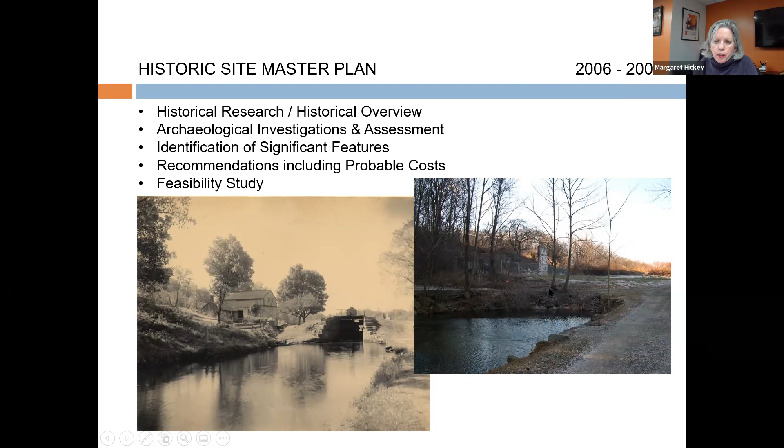It's so picturesque, it's really beautiful, but the only thing we saw was a little bit of the lock tender's house, which was essentially a ruin, and then also some of the stones from the lock visible in the grass. I'm pretty sure I have a picture of that here, you can see this here is that there.

Again, a historic picture of the lock tender's house, and a picture from 2006 when we came upon the lock. That collapse had literally happened like a couple of weeks before we even started our project. There was vandalism, so more of the wall had been standing, but you could see this is a fresh pushover by whoever did this.

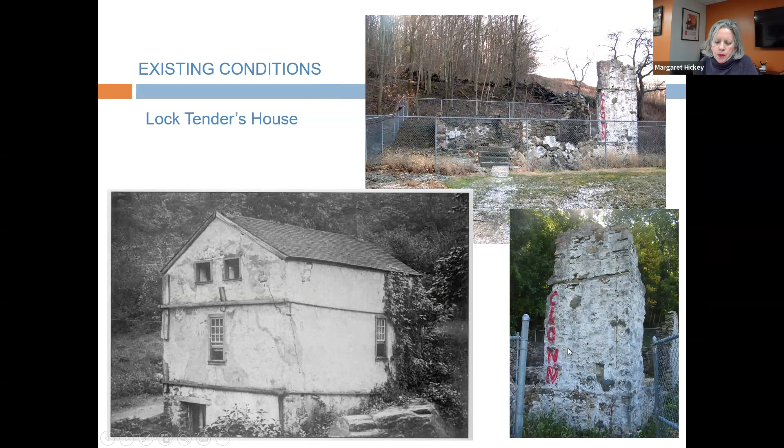Again, more pictures of the lock tender's house when we came across it. Here is one of the iron bars, which was from the inclined planes, used to tie the house together.

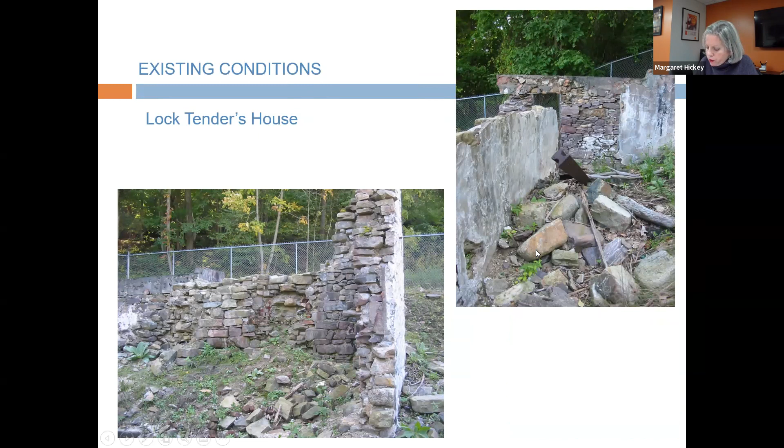When we actually started to dive into the drawings, we took another look at the property and really started to dive down into the detail. Here we have the masonry ledge for where we know the first floor level started. We have the threshold for the door and the door location, and we were able to locate all the doors and windows and things like that.

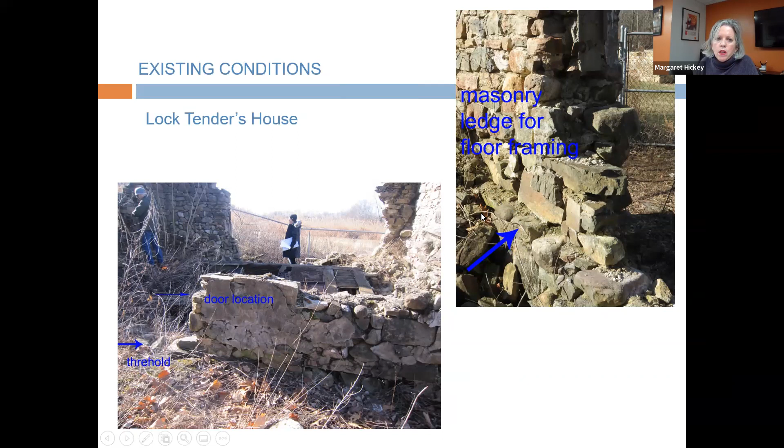The area where the fireplace was — this is actually a picture from a drawing in Bob Goller's report, which we were able to use because the basement was actually filled with all the stones. So we weren't entirely sure how wide the fireplace supports were and things like that. The other component of the project — but let me just go back.

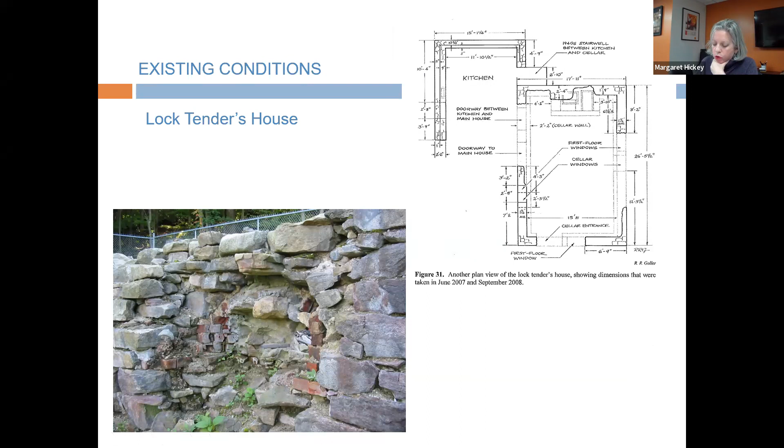Even with this amount of information, we really had a sense that we could restore the lock tender's house. And that was actually one of the recommendations in the historic site master plan.

Then the other component was the lock itself. Since that was completely buried, Hunter Research took the lead in investigating and doing actual digs, several investigative pits to determine what was remaining of the lock.

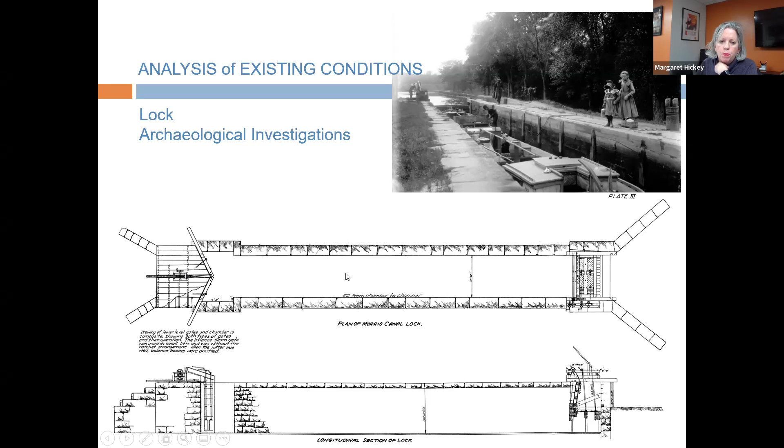We had some suspicions that a good portion of the lock, or all of it, was actually tipped over when it was dismantled. So a couple of the top feet were tipped over and popped into the lock itself. There was also a suspicion that some of the gates and mechanisms may still be there, and the archaeology really helped to prove that to be the case.

They found a lot of the remnants where they dug. We didn't dig everywhere, but where they dug they found evidence of many of the mechanisms. We found the capstones, and they suspected that the wood cribbing under the lock walls would be intact. So the plan then was to restore the lock as well.

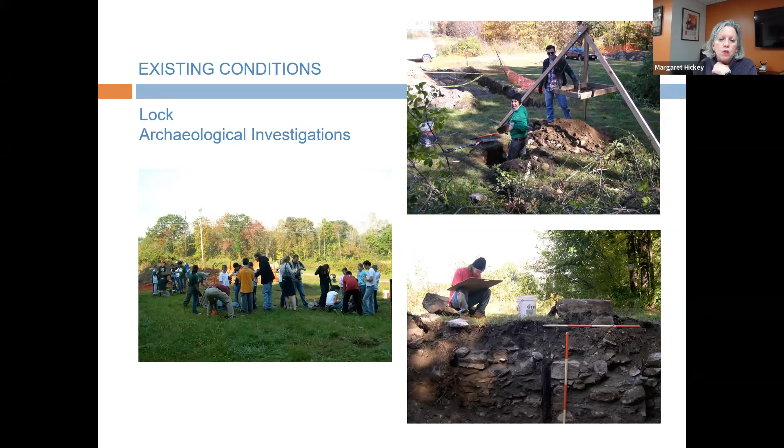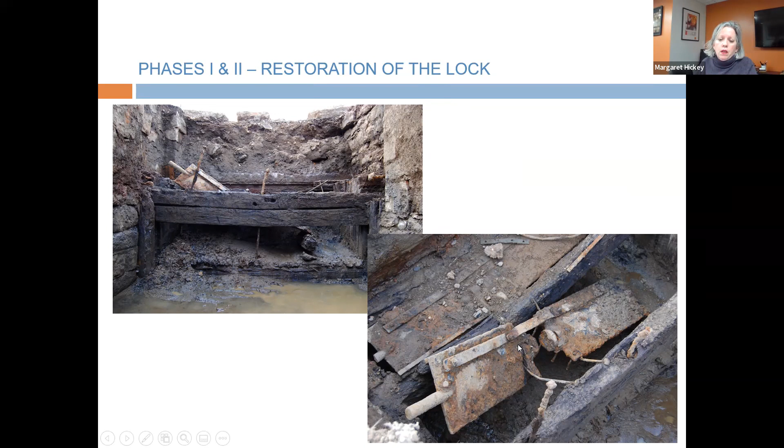This is some of the work with the cribbing and the wicket gates that were found in the excavations that Hunter did while the contractor was on site.

A picture of the lock excavated, showing the condition of the walls. You can see where there used to be wood embedded in the lock walls to hold a wood bumper wall on one side of the lock. There was so much evidence, so much to use to be able to restore the lock.

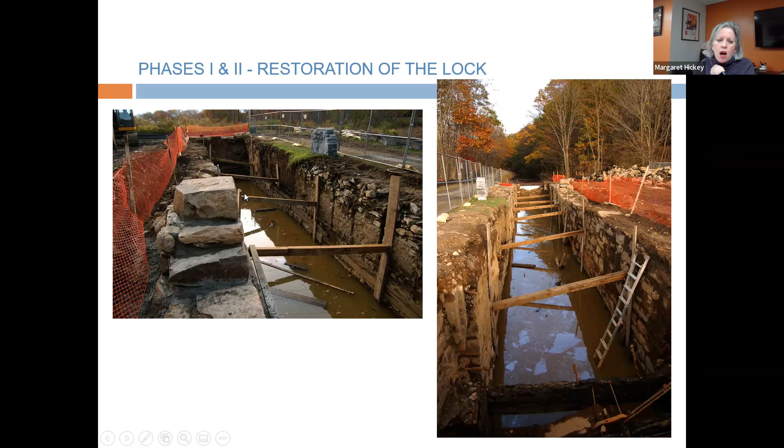The timber cribbing under the lock walls was apparently in good shape. You can see there's water in the lock, which actually helps preserve that material.

Here are more pictures of the work going on and stabilization measures. They hung these things above so they could cover things at night to protect the pointing, showing a lot of evidence of the evolution of the lock.

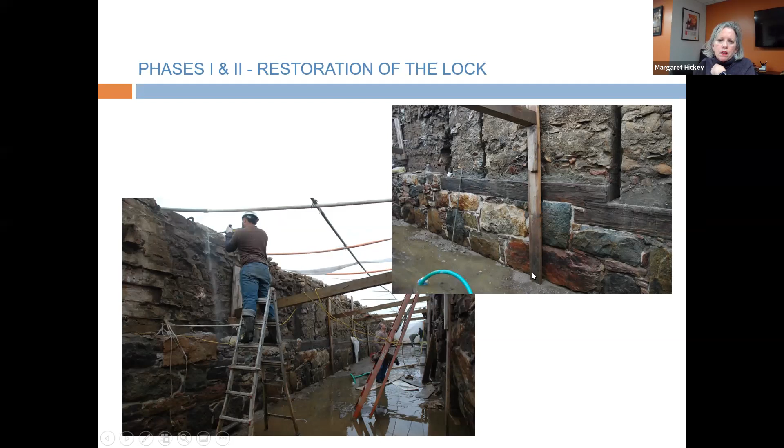Another picture of more stonework done. This is the east end of the lock where the canal comes in; the west end was pretty much untouched. So the scope of the work really focused on the majority of the lock walls, the east end, and the gates. The first phase focused just on the masonry.

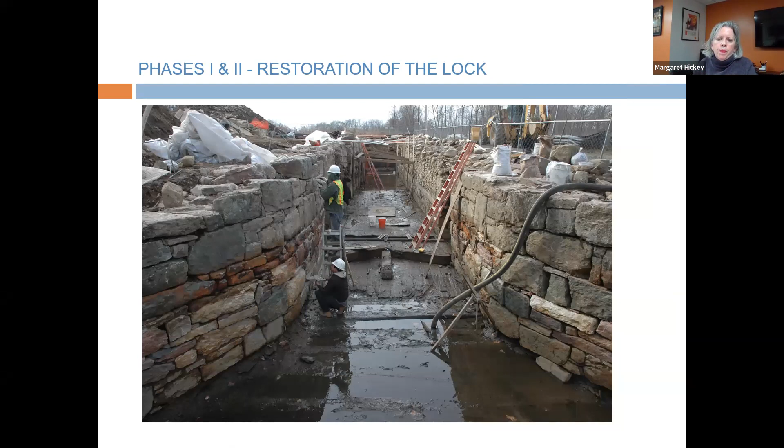The second phase took more of the lock out of the ground, restored the capstones, restored the wood bumper, and then rebuilt the miter gate at the east end of the lock.

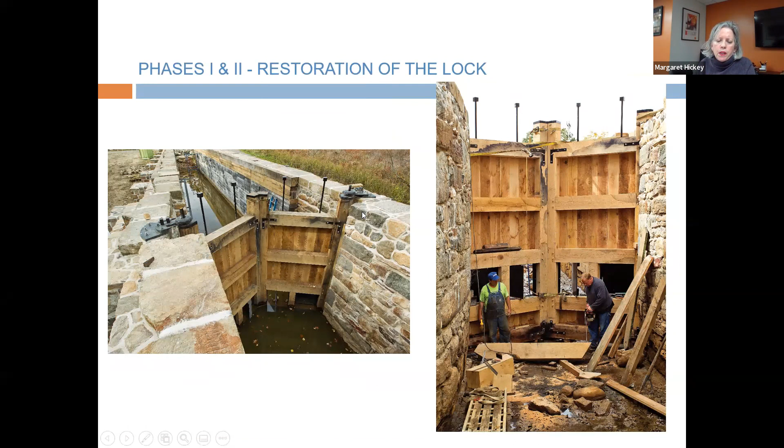So here it is under construction. See the massive size compared to the two men in the pit, and then this is it at completion, and this is it looking from the canal. That was phase 1 and 2 of the restoration of the lock.

John went back, pounded more pavement, and was able to get funding for our firm and Doug Bond's firm to prepare the contract documents to complete the restoration of the lock and also to restore the lock tender's house. With those documents, he was able to secure TAP funding from the Federal Highway through DOT to complete the entire restoration.

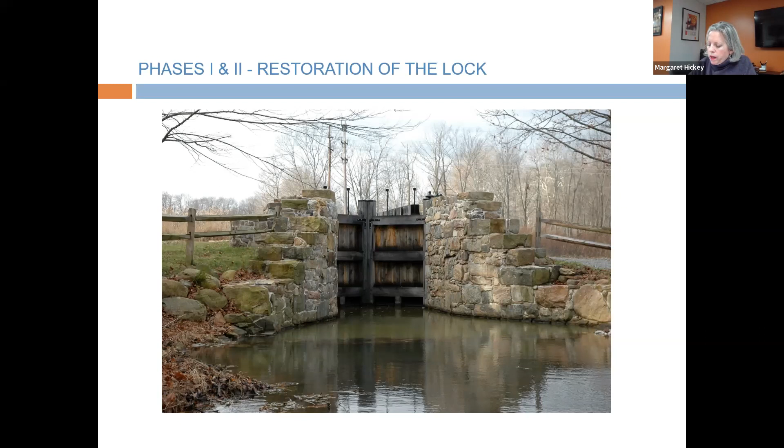I'm going to summarize some of the things we faced during this whole process. It was a long process, this second part. We originally wanted to finish the lock and stabilize the lock tender's house so archaeology could happen there, then do a separate phase to restore the lock tender's house on its own.

But DOT didn't like that, so we ended up combining the two projects, and that's how we're proceeding now. The contractor, as you'll see from the photographs, is working on both component projects at the same time.

This is the entire site, and I'll go over that. Let me just explain a few things first.

We had to bid the project twice because we didn't have enough money after the first time. We got the same two contractors and revised the drawings to clarify some things that came out during bidding. The borough offered their services on excavations related to installing the electrical service, and we were able to bring the project down a little. The current cost is about $3.3 million for the restoration of the lock tender's house, and also to provide barrier-free restrooms at Hugh Force Park.

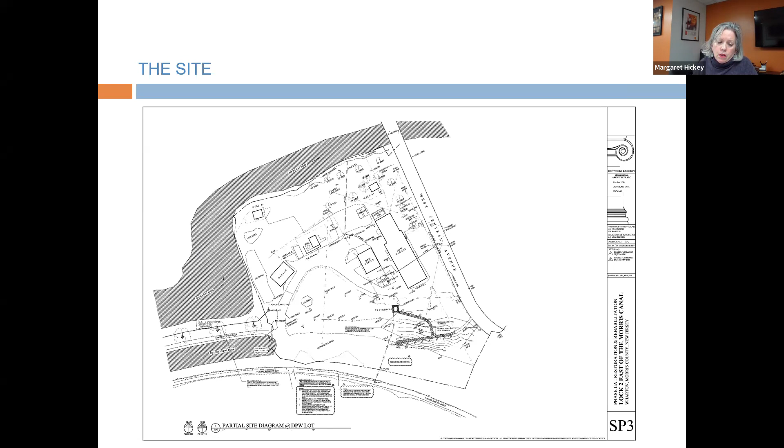The other problem was there are no utilities at the lock tender's house: no water, no sewer, no gas, no electric. So we decided all systems at the lock tender's house would be electric, and we're bringing new service from the street to the restroom building, across the parking lot, and along the railroad bed up above the canal. On the site plan, this is Hugh Force Park, this is the lock. The electric goes from here all the way down and across into the lock tender's house. That was a big part of the project, but a really important one, otherwise the lock tender's house would be usable for only a couple months a year rather than year round.

We're also proposing to put lights along the towpath, so that programming can happen more than just during the day, which is always nice. We really like when historic sites get more use than a couple of days a month.

We also had to worry about wetlands, endangered species, and open water requirements, so there was a lot of site work and project approvals from the NJDEP. We also had to make sure that our path around the lock and to the lock tender's house is barrier-free accessible, so we had to make some adjustments to how the site was manipulated in order to meet those requirements.

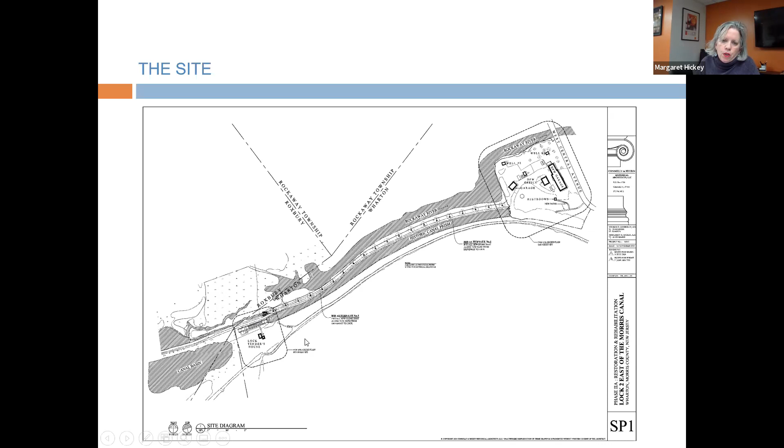Then when we were pretty much done with the design, we had to convince the New Jersey Historic Preservation Office that this was a good idea. And they did - we had them come out for a site visit. They saw all the stone in the lock tender's house, showing that a lot of materials are there for us to use. The lock had already been partially restored, so they saw that and were convinced.

This is the site plan for the lock tender's house. You come up the towpath, and this grade will be manipulated. We're going to go over a concrete removable bridge, which is really there to help the borough with maintenance of the property. Our ultimate goal is to connect the lock to the basin - whether that's going to happen or not is to be seen, but at least we're able to do that with this particular component.

So we're prepared - we bring people over the waste weir, over a little footbridge, and then up into the lock tender's house.

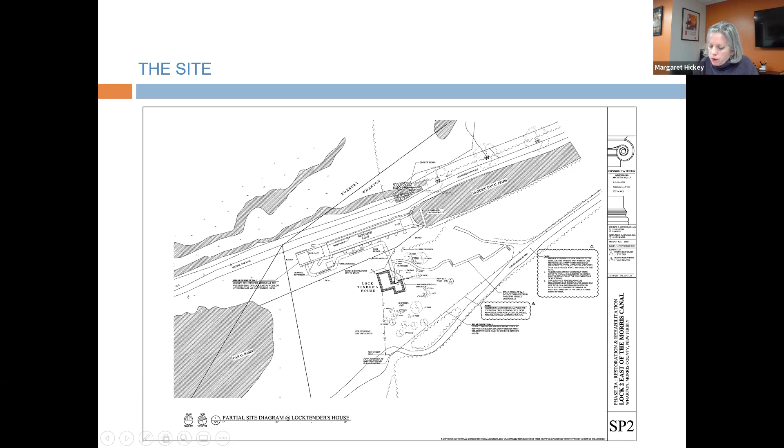The next part, I'm going to go through the sequencing of the project, almost like a month-by-month progression. The work started, and some things I'll talk about, and some I'll just show pretty pictures of how things moved along. We hopefully did this in enough chronological order that you see the progression.

We begin with the wall stabilization. We were very concerned, and the archaeologist was very concerned, about digging along the foundations with this particular piece of wall that turned out to be in worse condition than we thought. So one of the first things we had to do was go back to the Historic Preservation Office and say, this is worse than we thought - can we take it down to stabilize it and then rebuild it? And they did permit that.

So you'll see that this wall is here. The contractor did have to remove material in order to rebuild it, and this wall actually turned out to be unstable even below grade, so there was more work in that regard.

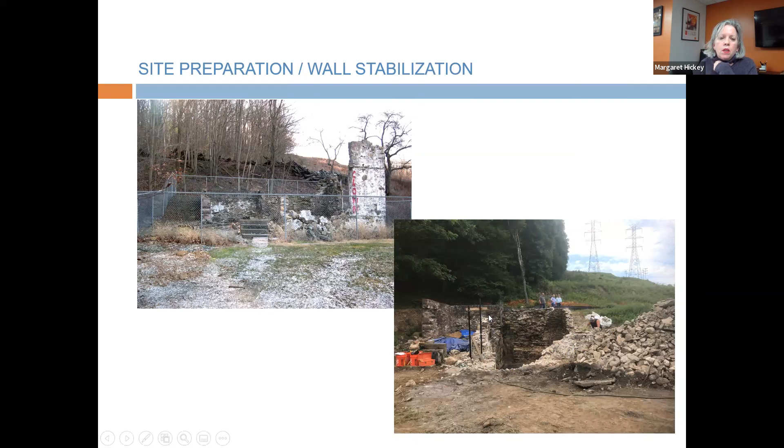While they were stabilizing, they took a lot of stuff out of the lock tender's house, but you remember the stone was pretty much up to here, and now there's like a pile of stone. There was a pile of stone over here in that last picture. All this is material that came out of the lock tender's house. Although this came from the lock, it was just stored here between projects.

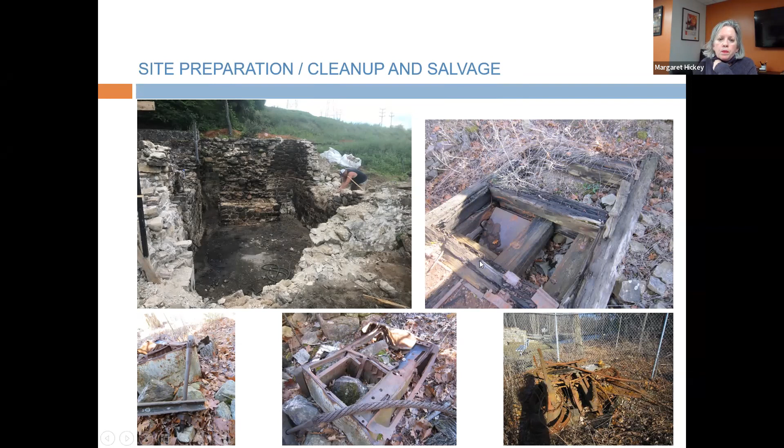Here's some archaeological digging going on. This is our structural engineer here. They dug a pit right next to the foundation so we could confirm the masonry was actually in good shape, and it really was on three sides of the building, which was heartening. The front needed a little bit more work than we anticipated, but we always build allowances into our projects.

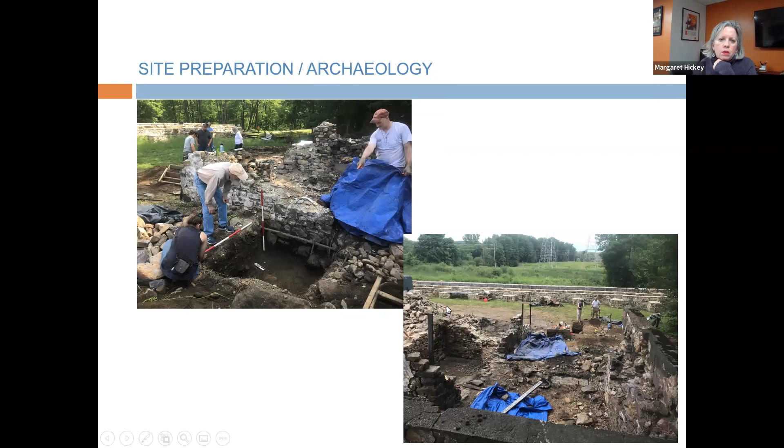There's an archaeologist there, getting ready to move forward with construction. More archaeological digs. We were able to confirm the floor levels between the buildings. We did our best educated guess, but we were pretty darn close. The front wall of what we call the kitchen wing, this area here, showed to be wood in the historic pictures, but historic pictures are from really far away. This dig confirmed that indeed the front wall was of wood construction. It's always nice to confirm your beliefs through archaeology.

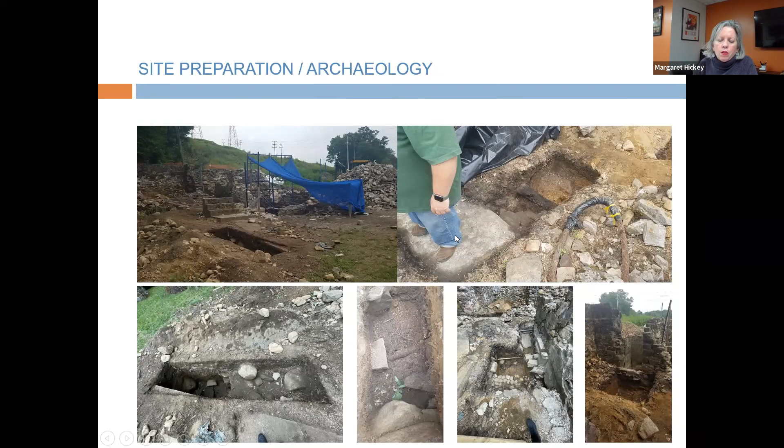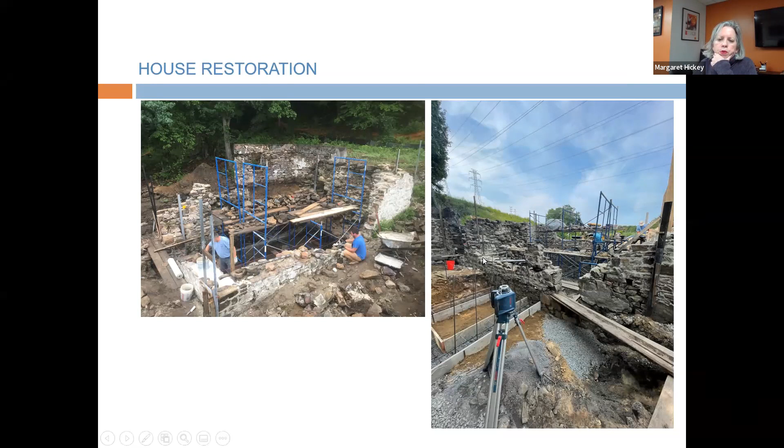Now we start to see the construction going up. The mason has his level out, they have their scaffolding going. It is a slow process - it took several months for them to rebuild the stone masonry. They had to do it in sections because they built to a certain point, then brought the floor in, then built to another point, then brought the floor in again, and you'll see that in some of the photographs. So here we are with the construction progressing.

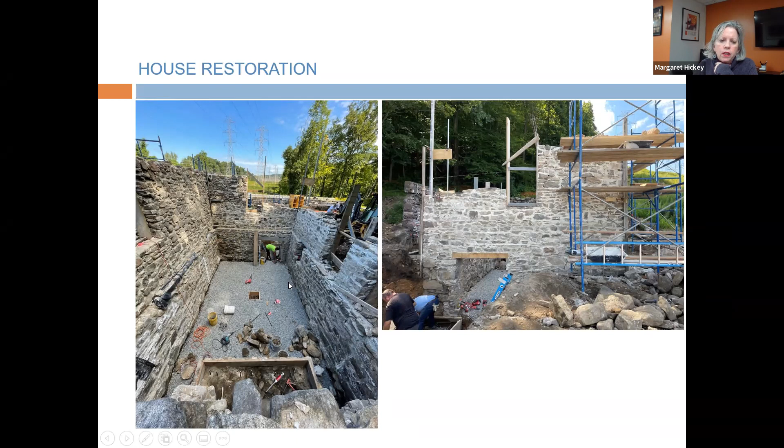When they took the stone out of the basement of the lock, they actually found what we call a rat slab - a cement floor, very thin. It had a mid-20th century date on it. Somebody did date it, which is interesting. We couldn't save it - I think we saved that little piece that had the date - but because it was too thin and we needed to put equipment in, we put in a new slab. But you can see the ledge around the perimeter of the building where the first floor framing sat, so it's always nice to have clues in the architecture on where things are supposed to go.

This is looking at the junction between the entrance into what we call the main house and the kitchen wing. Again, we have to be barrier-free accessible. We note that this is all modern construction, but this will all actually get buried - you won't see any of that, with the juxtaposition of the historic fabric behind.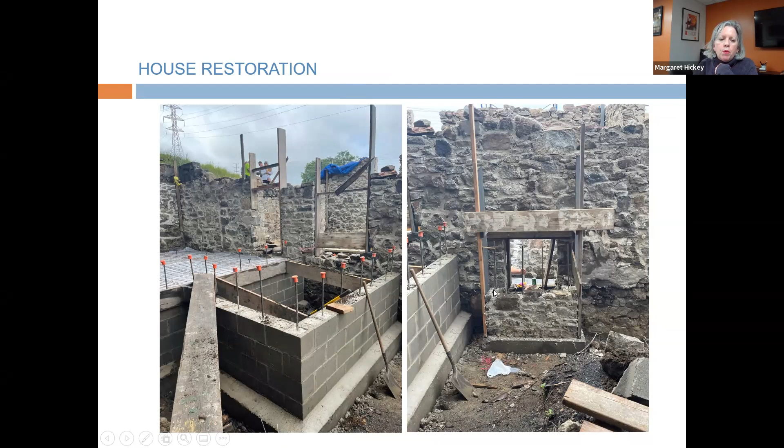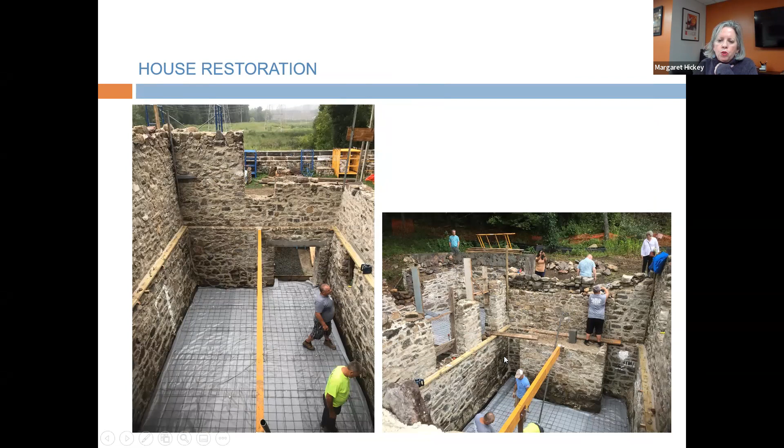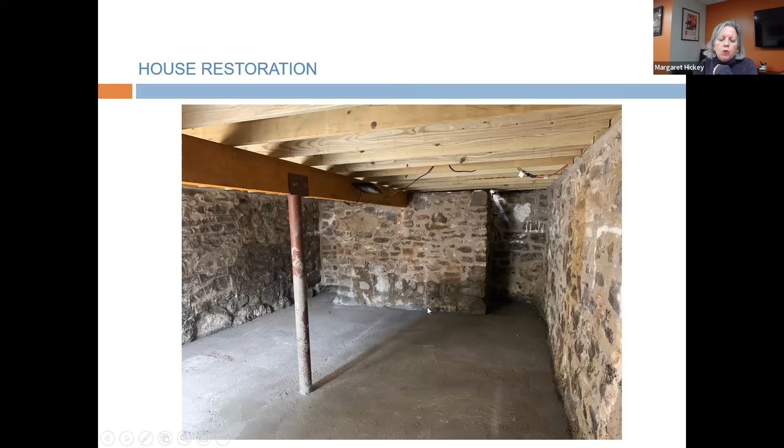More construction going on, the center beams going in, multiple things going on at once, which was nice. Here is the basement with the first floor framing installed, and there didn't need to be a lot of work when we actually took the stone out of the basement. The fireplace support was pretty much intact - they had to repoint it and such, but most of it was there. Here's the entrance to the basement that we saw in the historic photographs.

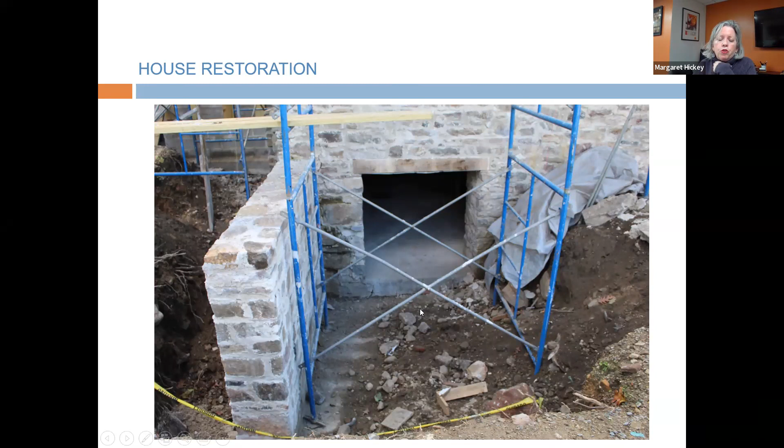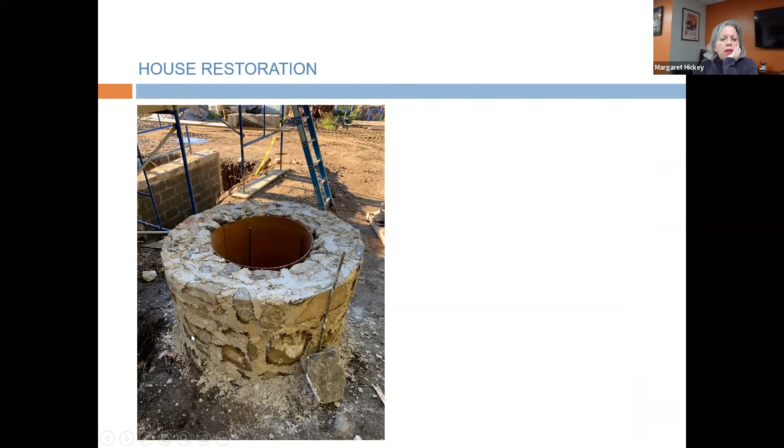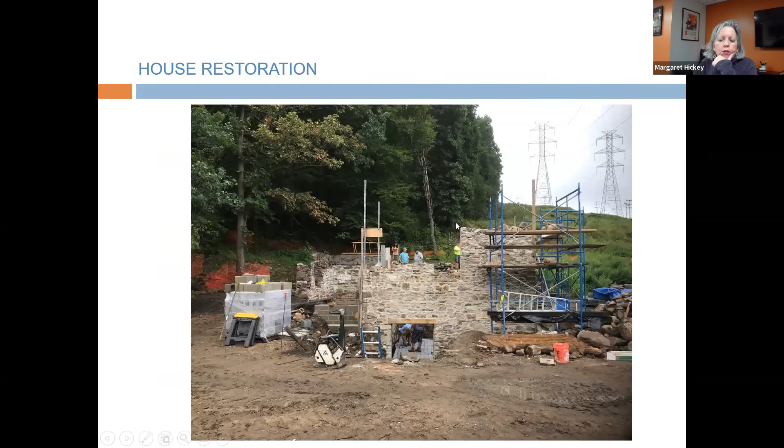In preparation for water and things like that, we will be putting a drain outside the door so we can prevent flooding and moisture infiltration in the basement. The well, which we could barely see on the ground before we started the work, started to take shape once we did the excavations around the entrances. Here we see things starting to go up a little bit more. Picture one, window barely there; picture two, window in, and we're about to hit the second floor level.

More construction. You can see they're starting to put in the framing for the second floor.

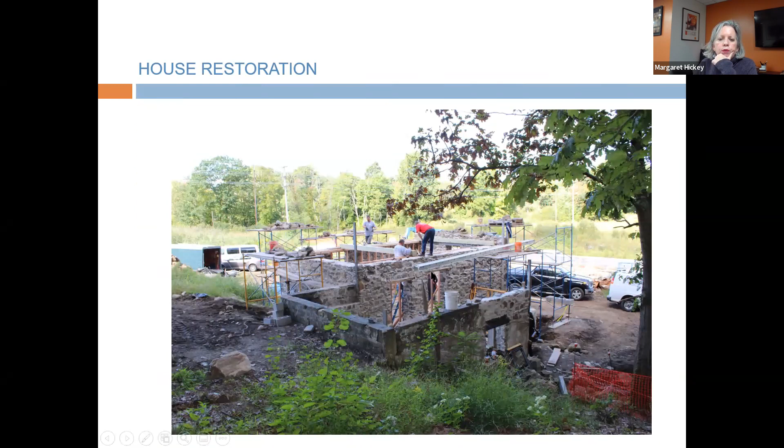This photograph is interesting. When you walk in, you're going, there's wood in this construction. I don't know why that's there, but they've installed that in order to make sure they have a level floor. Then they build the masonry up into the bottom of the wood, and then they take the cribbing out.

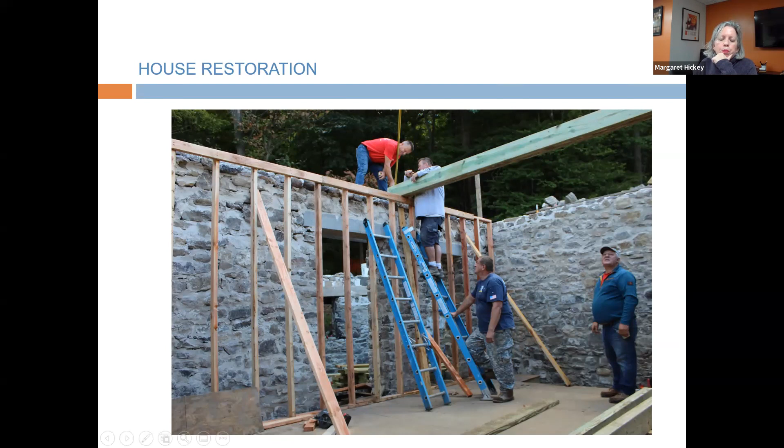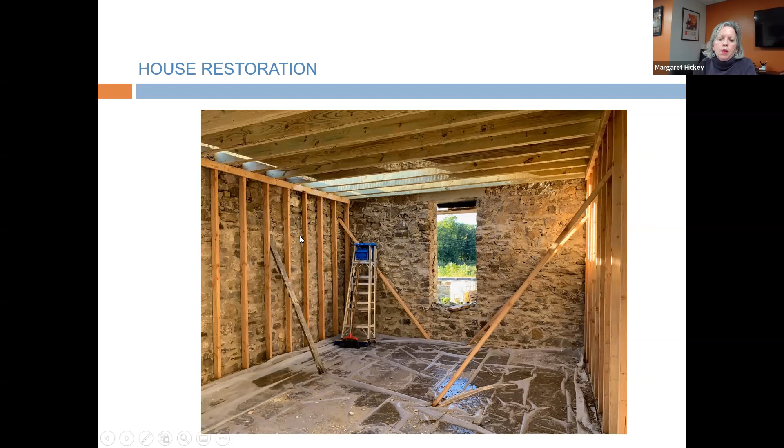So they did a really nice job on framing. This is not how we frame now. A lot of people don't do traditional masonry construction anymore. So this is a view of it all framed before they took the temporary shoring out.

The lock tender's house is progressing pretty nicely. Now we're going to do a little bit of focusing.

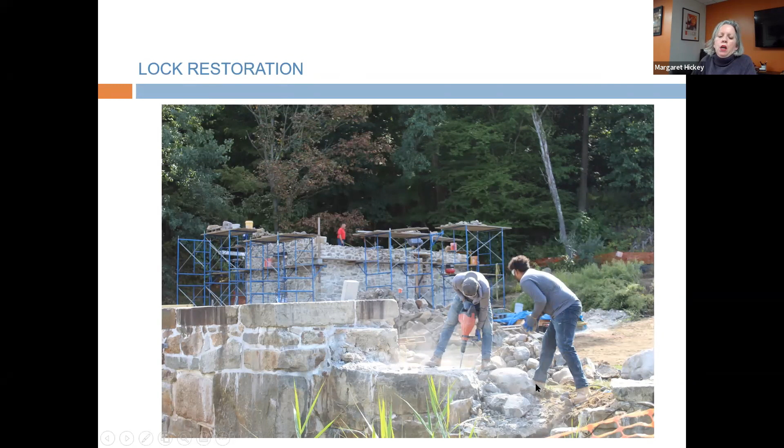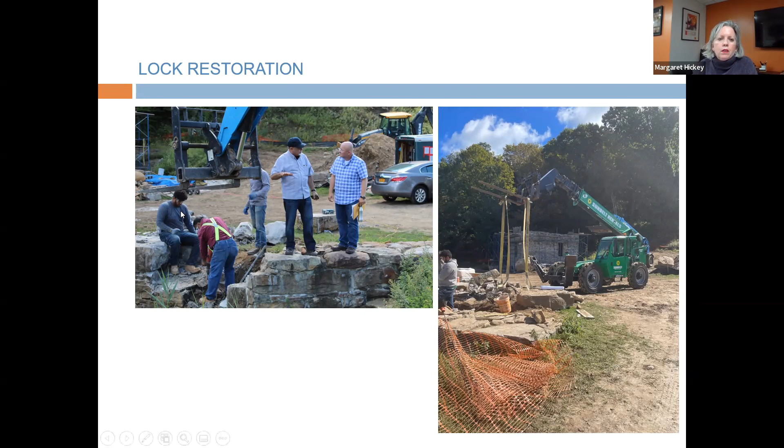The water from the basin was actually migrating into the lock, and that stopped construction. They pondered and thought, and talked about $300,000 change orders and things that were making my head spin. And all they had to do was lower the level of the basin, and it solved the problem. That took like 2 or 3 weeks. So the lock restoration stalled a little bit.

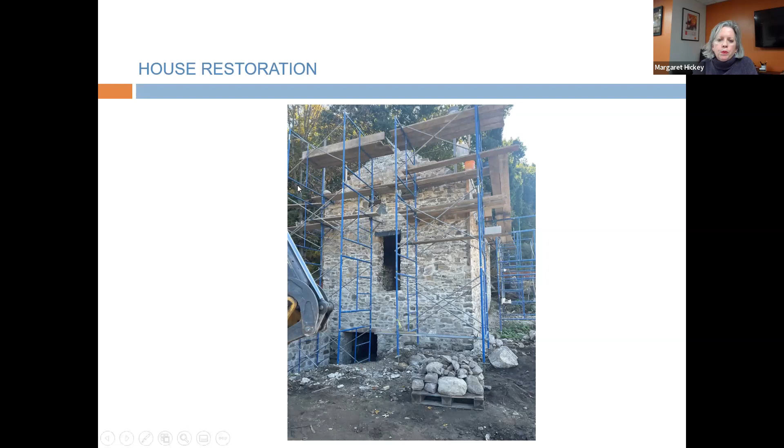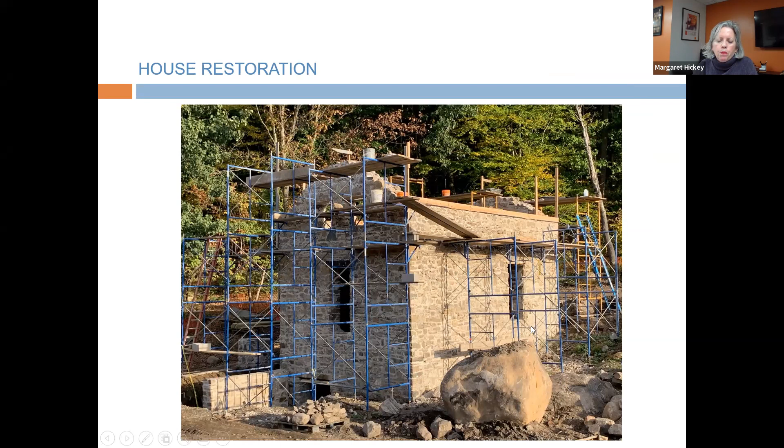So more of the house continued to go on. Here it is almost to the peak of the roof. Again, you can see more of the windows taking shape, and the roof line taking shape. That pile of stone is gone. That boulder was always there.

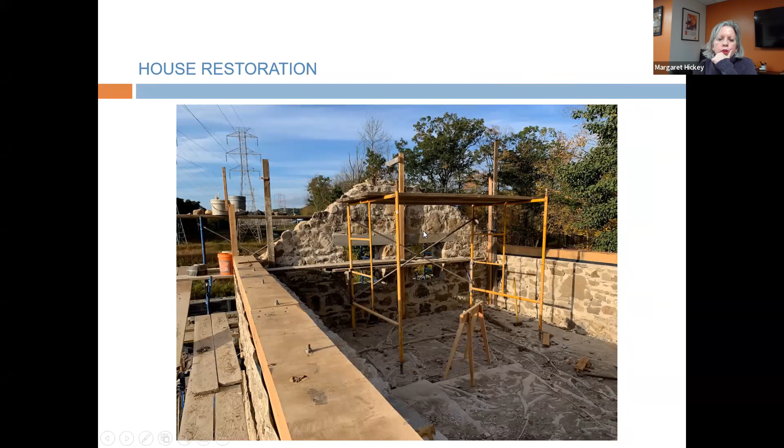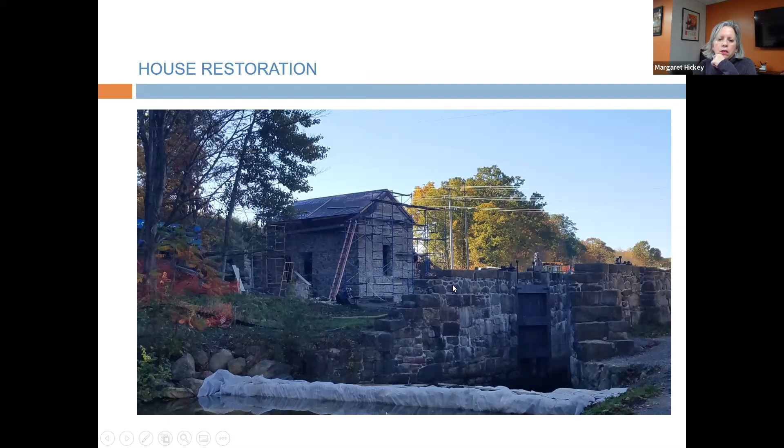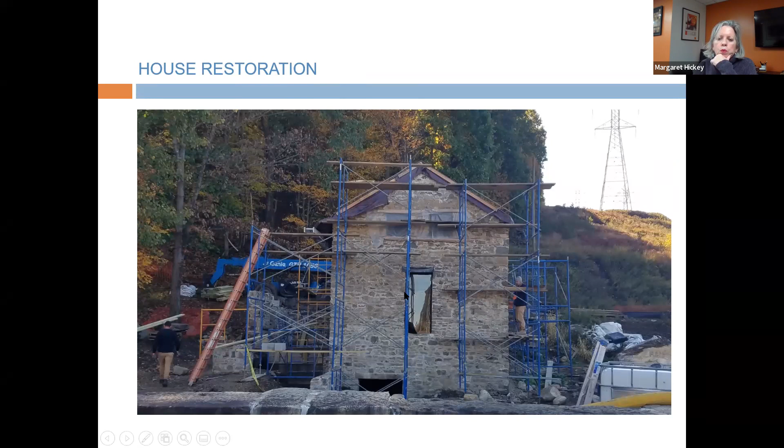And here we have the roof going on. Again, a nice view looking up with the relationship of the wing, which is still not there. They really focused their primary focus on the main house, and then worked on the wing. Again, from another view.

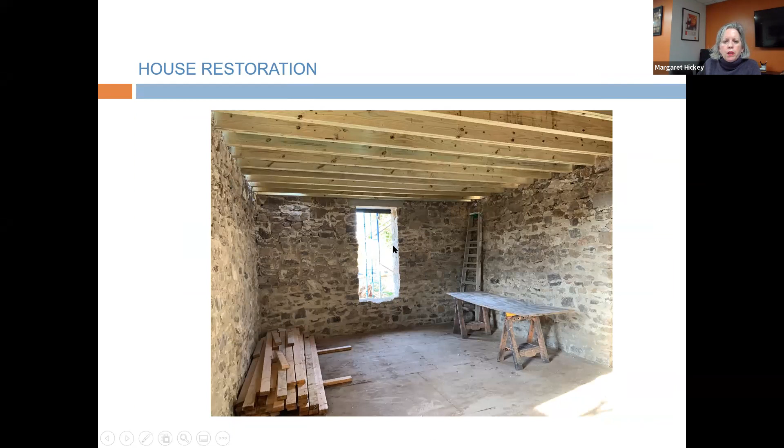And then from the inside now with all the cribbing removed. So the windows - I know you won't see windows in this at all. They are currently being manufactured off-site in the contractor's offices in Trenton. They'll be one of the last things to be installed. We are at, I believe, 47% of overall construction.

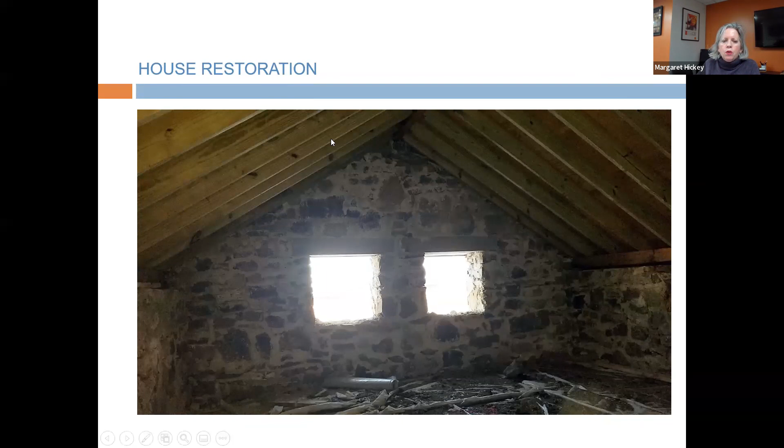And then this is the attic, so you can see the roof is framed. A little detail on modern framing, modern attachments to meet current code requirements, and then the framing getting ready for the reconstructed chimney, which there will be no fire in the fireplace. It's for show.

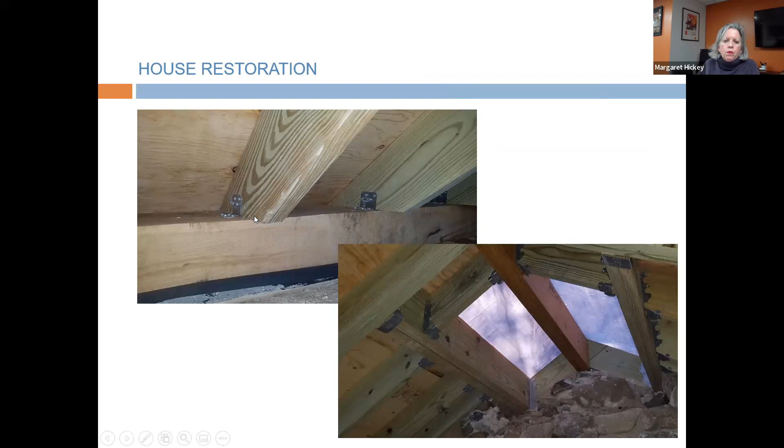So back to the lock restoration. On this particular project component, although our office is there all the time, Doug Bond's firm is really the project manager for this component. We know some of the discussions, but we didn't actually do the design, so he knows more about the nitty gritty detail of the decision making. But I'm going to show you some pictures that show the progress and just how intense the construction is.

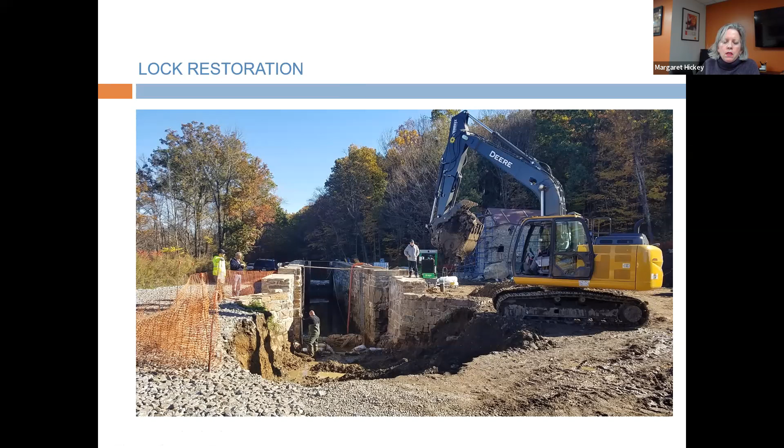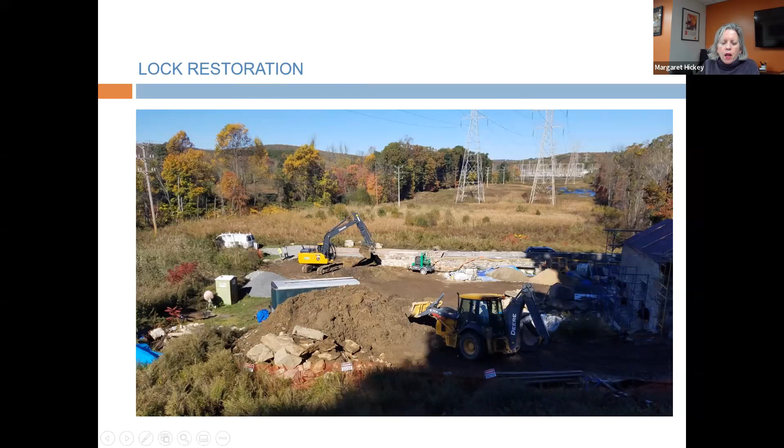So this is up from the hill. Actually, the house is over here. A good view of the lock. A lot of heavy equipment was necessary for the restoration of the lock itself.

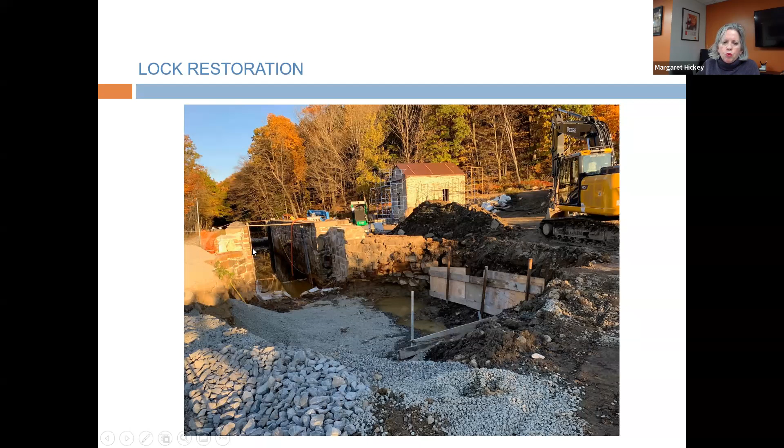Excavations in order to be able to build the new supports for the concrete bridge. That had to make some adjustments to the wing walls. One of the components is actually to restore the drop gate as well. Again, another excavation.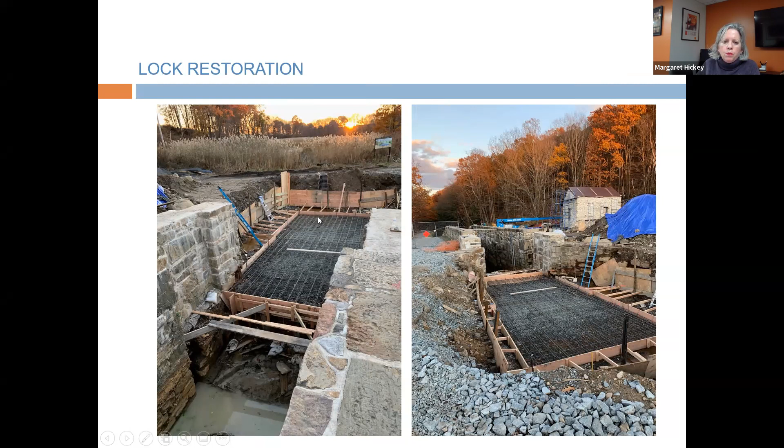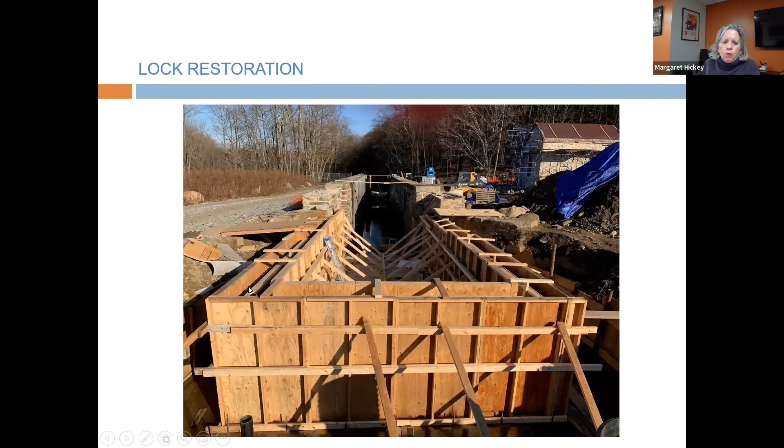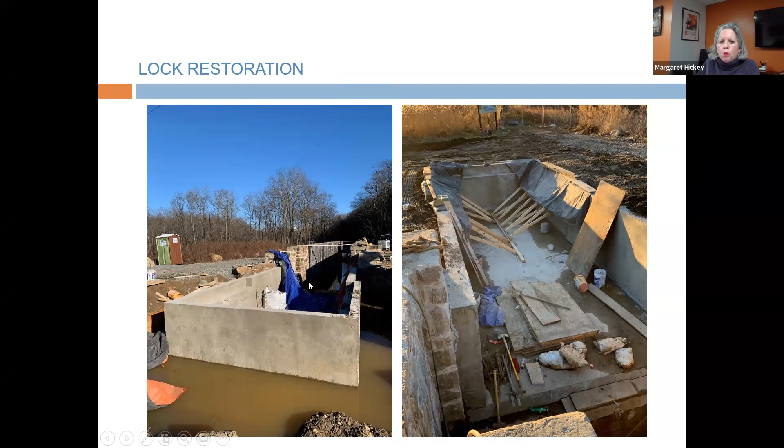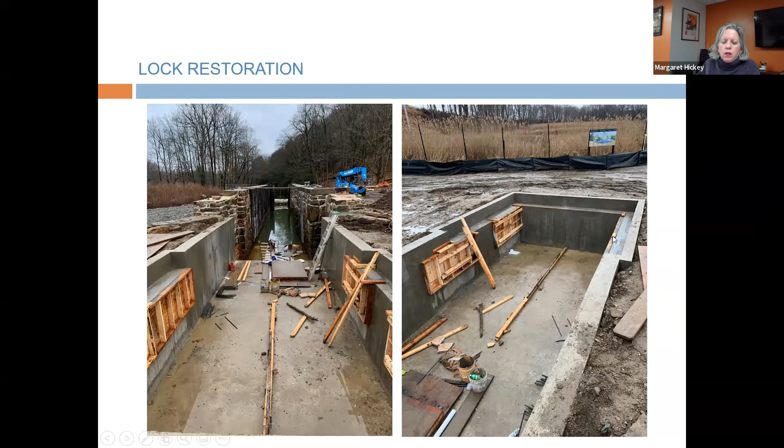Also the concrete formwork going in, the rebar, all the reinforcing, formwork going up. Again, more formwork. And then that's the pour. I believe it's my understanding that this is one of 2 pours that is necessary. So this is the first pour, and I believe the next pour may wait till spring. I'm not really sure. But you can see where that gate is going to go - that concrete deck is going to go in, and that's removable.

And then we're back to some of the more detail-oriented stuff on the inside and outside of the lock tender's house. We did have some pictures of the fireplace. We did allow the contractor to use CMU above the basement. This is all going to be plastered, which makes the construction lighter, which is generally better, particularly since we're not using it. So all the things that are visible are traditional materials. All the elements that are going to be plastered are modern materials, similar to the framing.

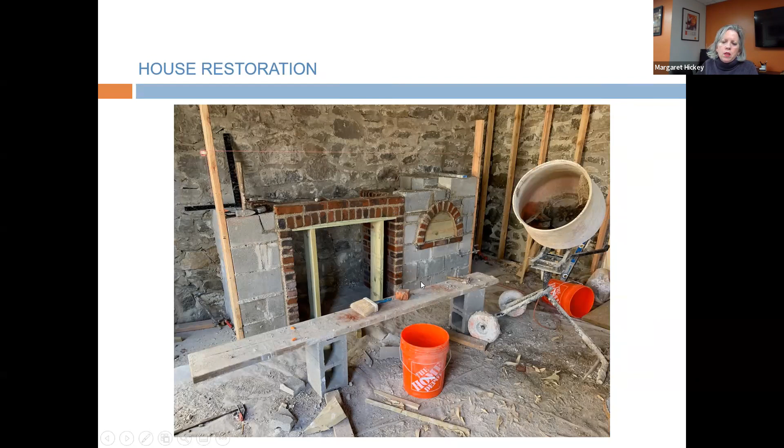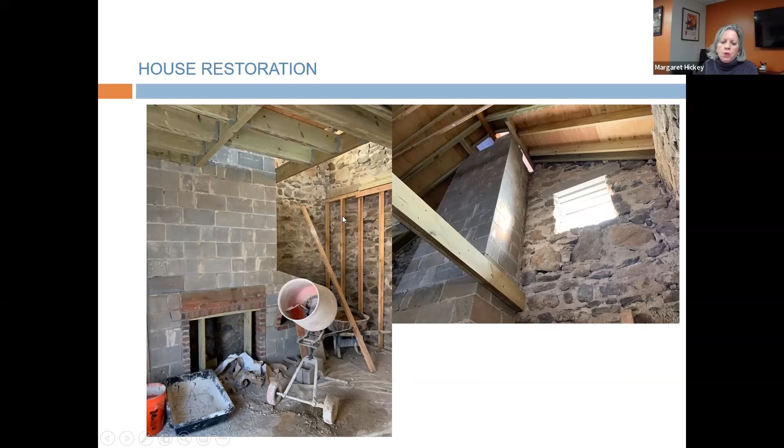Here are two pictures—this is more of the fireplace surround built. This is where the stair is going to go to the second floor, and this is looking up to the area where the stair will be. Again, a broader picture of the fireplace and the room showing the juxtaposition of things.

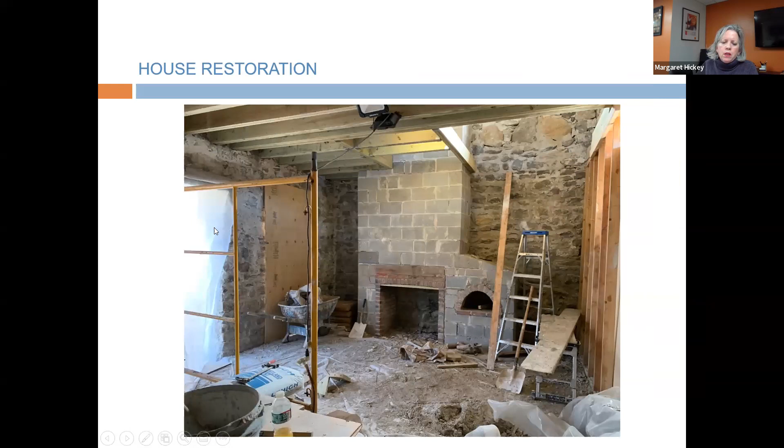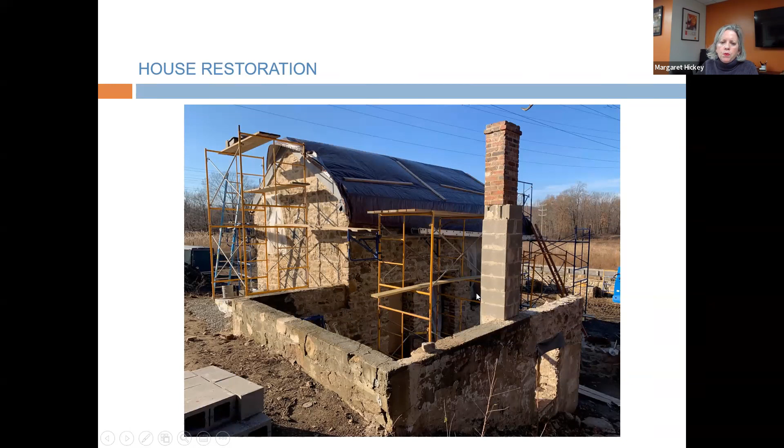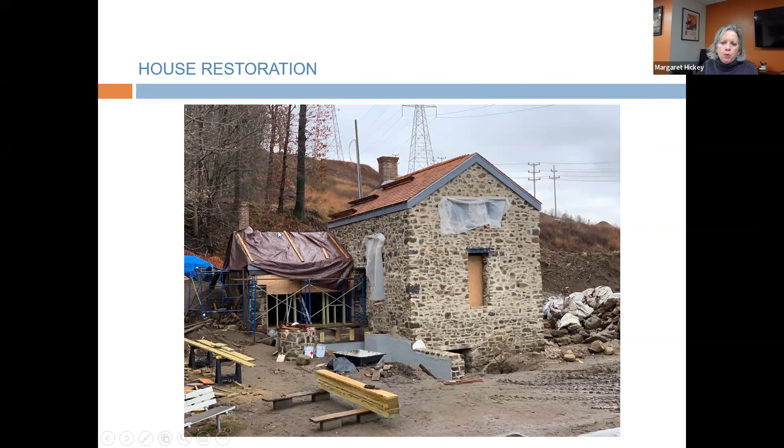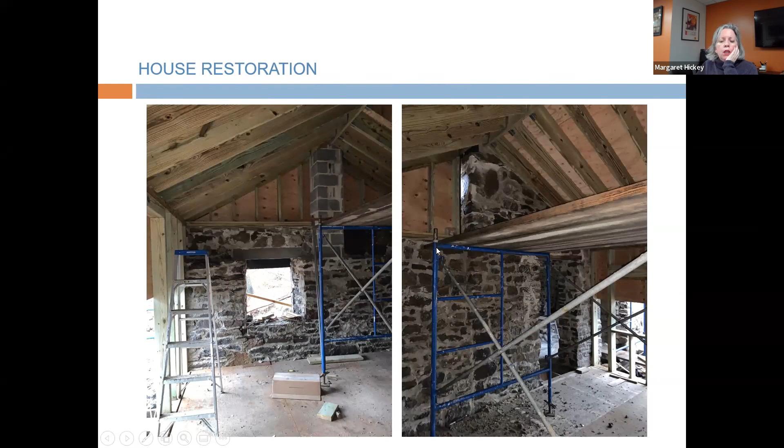They're going to build the windows and the doors. They actually have a door and window manufacturing component to their company. Tom's telling me our next meeting is going to be there, which would be nice.

They're also going to build the shed that goes over the lock—I forget what it's called, but there's a little shed for the mechanism, for the lock tender to pop in and out of when he's dealing with the mechanism for operating the gates.

I believe they're going to start manufacturing the components for the drop gates as well, which is a big component. Like I said, the lock itself—that's McMullen and Associates. They did the first two previous phases, so there's nice continuity on all the projects.

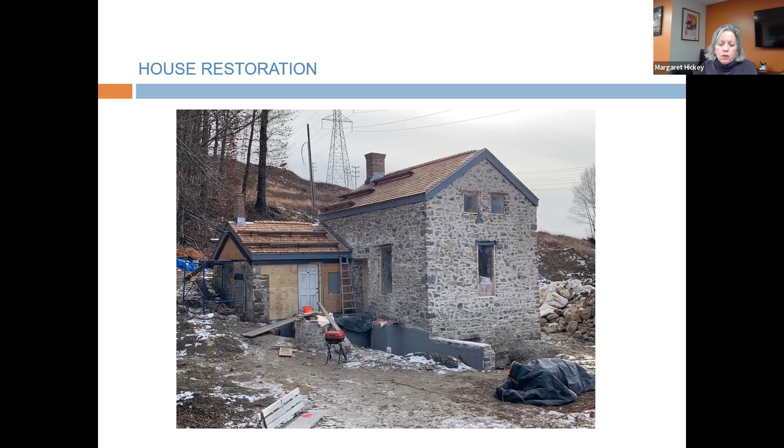I think they've really pretty much worked out the gates and how they're going to operate, and what they need with regard to component pieces. There was a lot there that the contractor could use as a model for the reproductions, which is quite nice. You don't often get that, so that's been a real help.

So I want to thank you for allowing us to bring you up to date. Like I said, we're only at 50%, so we're not quite there yet. There's a lot of site work that needs to happen, a lot more at the lock, and then of course all the interior finishes—air conditioning, heating, lighting—a lot still left to do.

The contractor has until October 2022 to complete the project. His goal is to be complete by June or July of 2022—he doesn't necessarily want to be here in the fall. I can't blame him.

And I want to thank Joe—there was a lot of pictures from Joe in our little summary there. He's out there probably more than we are, just because we're out there every two weeks. We have a project meeting every two weeks.

And like I said, there's a resident engineer that the DOT requires, so there's this third party independent person really looking at what's going on and making sure that what's on our drawings is being executed by the contractor, which is nice—something we don't normally get.

Do you think I should keep this up for questions? I think that would be good if people do have some questions.

Considering what you've done, next time Mr. McCullough builds a canal, you can give him some good advice. Maybe.